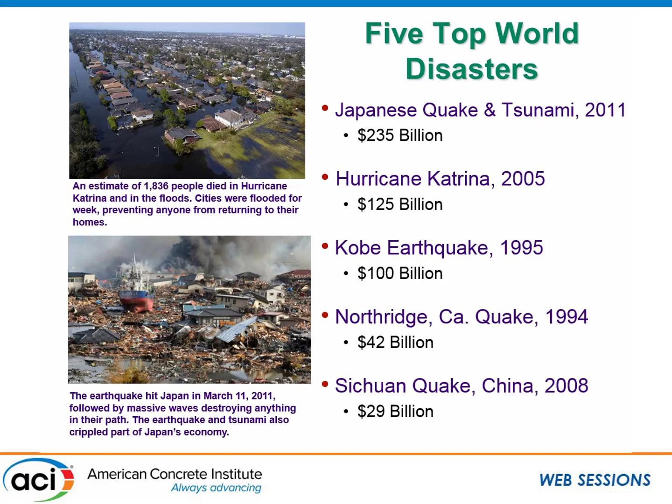When we really look at resiliency, what we're seeing today is a lot of disasters occurring. Obviously this isn't an up-to-date slide, as we'd include our most recent disasters in the United States as well as those in the Pacific Rim. But what we see is that these disasters cost an enormous amount of socioeconomic dollars, as well as loss of life, loss of natural habitat, and loss of natural materials in many cases.

When we look at climate resiliency, we may look at it in many different ways. I like to look at it as your surrounding community, as a structure and the protection of that structure. It's not so much the impacts that the building has, but we need a structure to survive the impacts of nature as well.

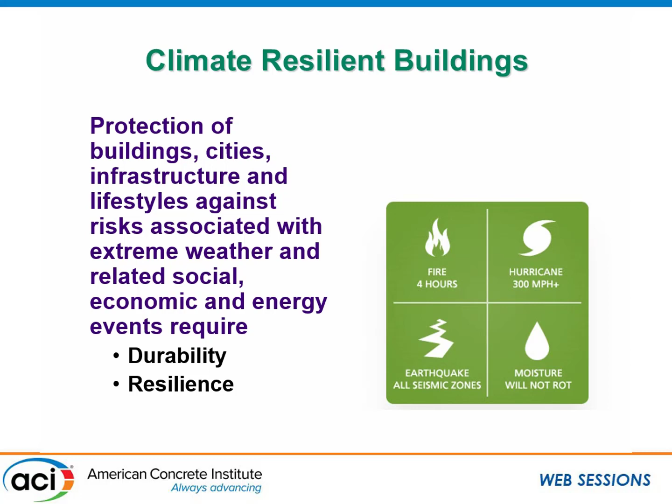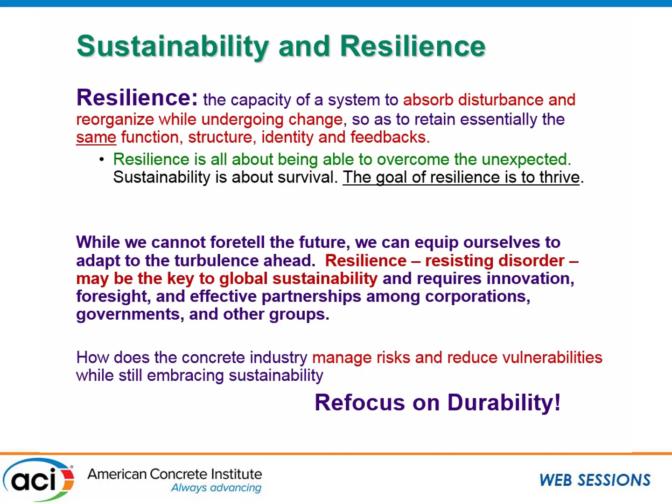This comes back to Dr. Miller's talk about durability and resilience. Durability will really dictate the life cycle assessment. When we talk about resiliency and sustainability, I like to look at them a little differently. I like to look at resilience as a very low probability event with a catastrophic conclusion, whereas sustainability involves everyday events that we must plan for, but which may not be catastrophic.

When we look at resilience and sustainability, this is where we start to see how chemical admixtures, performance cements, and high performance specifications can all be very helpful. Certainly we need to look at the adoption of codes, not prescriptive codes, but looking to the future of maybe performance-driven codes.

We look at some of the code changes now, like the Model 2010. We see changes starting to happen in ACI 318, and we know we have more to go, because certainly we need better materials to withstand disasters. If we look at the bottom graph, a natural disaster can have true consequences on the socioeconomic character of the community.

You can either bounce back very quickly and return to its natural state. Some of the things we're seeing now in code adoption is how fast a building can return to occupancy, or we can see simple devastation in the red line where that community will never return to its vitality.

Case in point, for those who missed the Sustainability Forum yesterday, there was a discussion on the difference between Hurricane Katrina and its impacts on New Orleans. That city has never quite recovered. But if we look at the same kind of plan and activities going on in a city like Nashville, it's booming in its economy now.

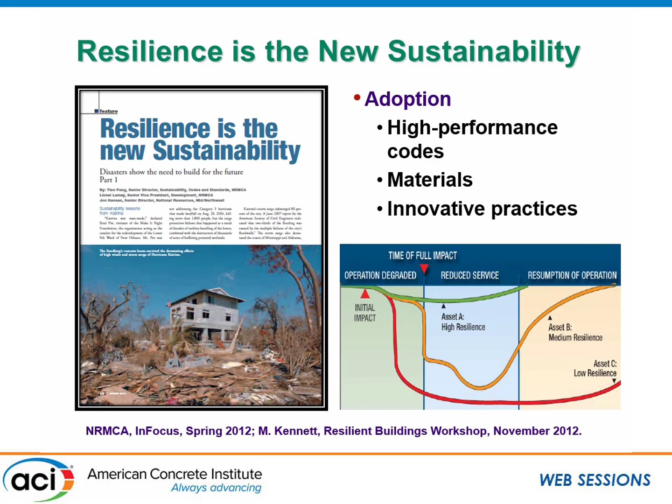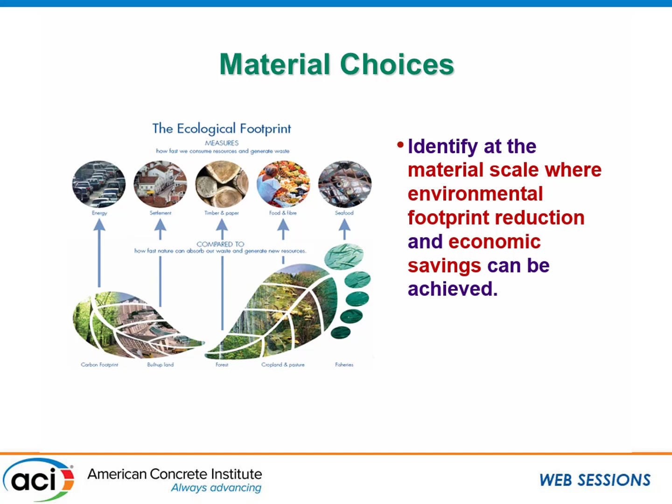So we can see devastation can have impacts in many different ways. But we really must look at materials as well and their impacts. We have to look at the environmental scale and the material scale, so we can look at the carbon footprint from energy from different types of structures, and we can look at the economic savings it can bring.

When we look at materials, a lot of us like to look at embodied energy choices. But I caution you, don't look at just the material and its embodied choice. We're going to look further into the whole life cycle assessment as was presented by Sabbie Miller. When we look at concrete as a whole, it has a very low embodied energy in its production.

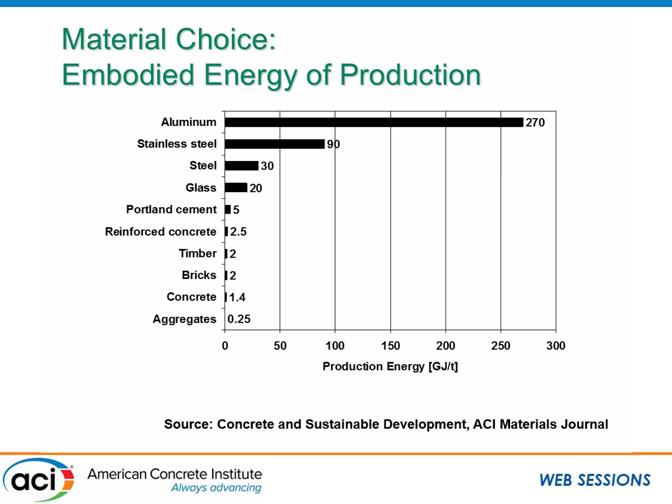Now in comparison, cement is very high and has a much higher corresponding embodied value. But normally when we build, we don't build with cement, we build with concrete. So when we look at cement versus concrete, we know cement inherently has very high embodied energy. It really can't help that, because of the decarbonation reaction that takes place when we burn limestone.

So when we look at the sources of CO2 in cement and concrete, this is an older figure with about 33 billion tons produced in 2011. We know that for every 1 metric ton of cement, we're going to see approximately 0.978 tons of CO2 produced as well.

But there are ways that we can reduce that lever, and that's where we'd have heard from the first presenter, had he been able to make it today, he would have talked about some of the levers that can change what we do to help cement be lower in its embodied carbon. Much of this comes down to cementitious blends as a method of reducing CO2 and also improving durability.

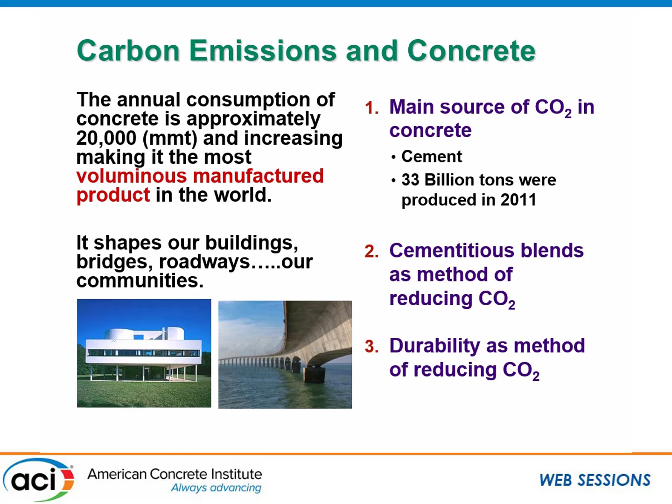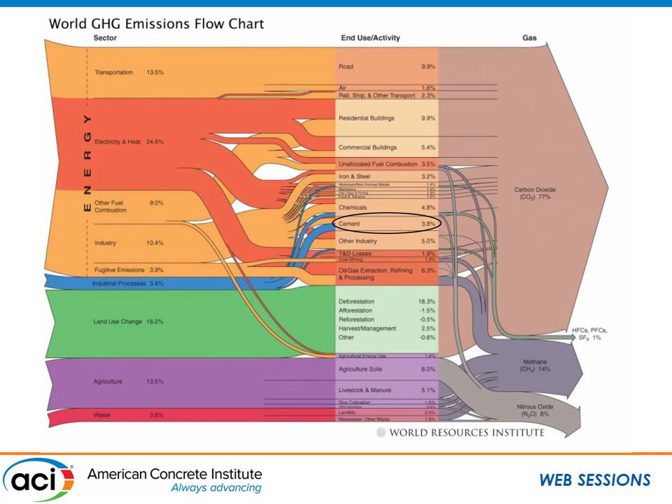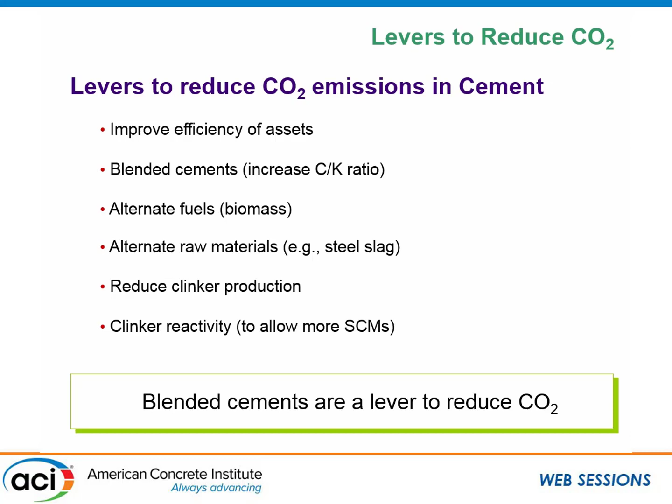The levers to change cement are simply improving the efficiency of the assets, using blended cements, alternative fuels and biomass, alternative raw materials in manufacture, reducing clinker production, and changing clinker reactivity. But really, blended cements are the best way to lower the impact of cement production on CO2.

As we look at raw material substitutions, we can see that if we have 1 metric ton of dry raw materials, we still have calcination occurring in the decarbonation, and we're still going to see production of CO2. But we can really lower that when we start looking at using blends in lieu of straight Portland cement.

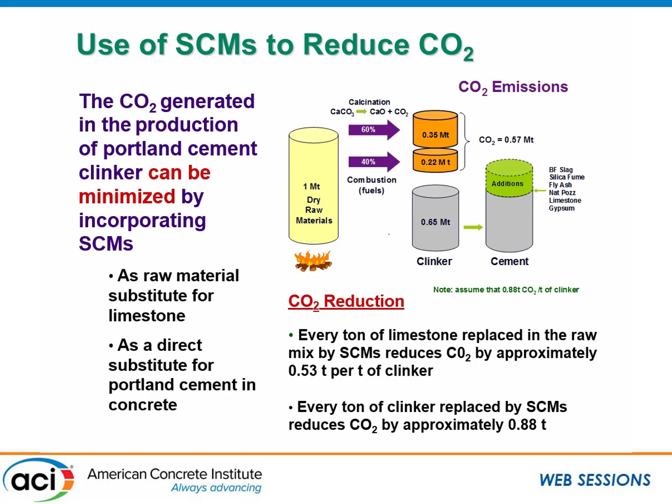We can see those reductions when we start blending slag, silica fume, fly ash, or other natural pozzolans. For every ton of limestone, limestone can also be used to replace raw mix with SCMs, and we can see almost a reduction in CO2 content.

A small percentage of embodied energy is only in concrete versus cement, certainly about 100 to 300 kilograms per cubic meter. Concrete typically uses 7 to 15% cement by weight.

If we can lower that impact of 7 to 15% by weight by using supplementary cementitious materials, other pozzolans, and blended cement, we can inherently impact the amount of CO2. We also see CO2 reabsorption through carbonation, and from calcination we can see 33 to 57% of CO2 emitted and reabsorbed by carbonation over a 100-year life cycle.

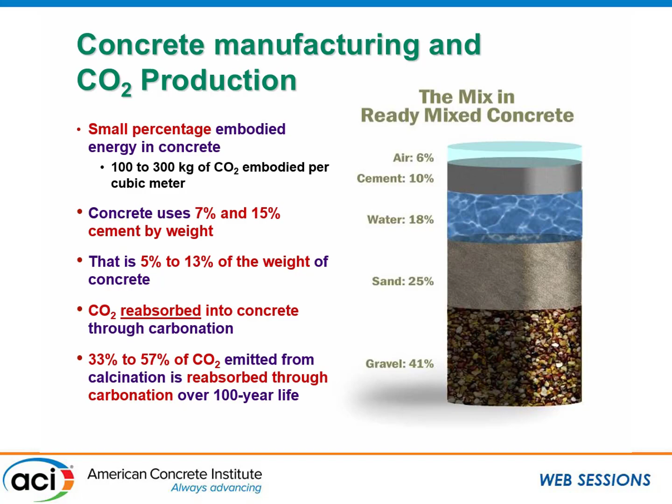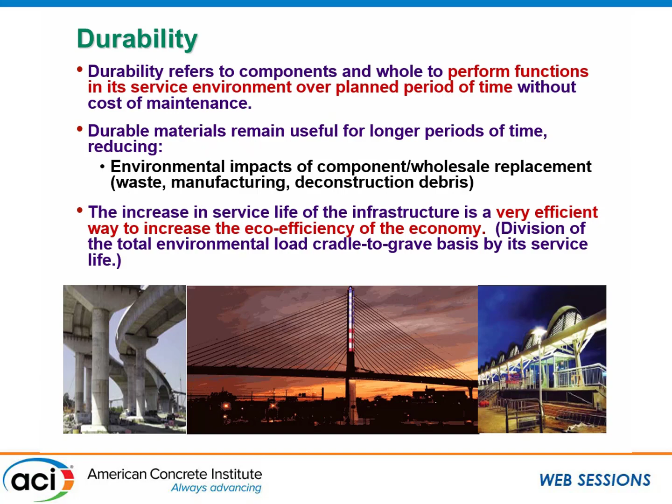Just in closing, I'm going to go through a few slides to cover what Sabby was talking about: durability, the ability to perform your function in a service environment over the planned period of time. We can do this very effectively when we see blended cements.

Here's some data that discusses a ternary blend. In this ternary blend, we were using between 4 and 6% silica fume and anywhere between 25 and 40% slag cement, looking at how it impacts durability characteristics.

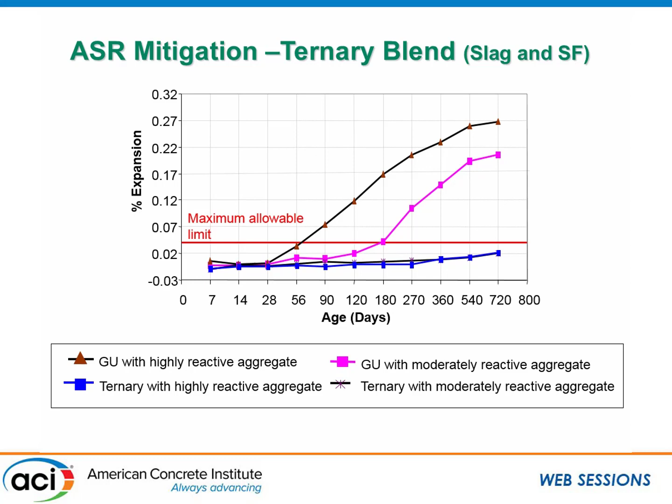Here is ASR mitigation. We can see there are 4-25 blends and 4-40 blends here, with silica fume being the 4, and 25 being the slag. We can see what would happen with the RCP data at 1 year and 2 years.

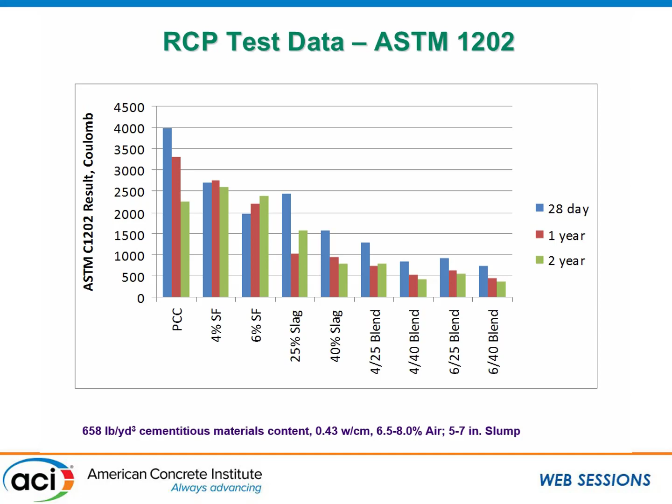We're seeing much different results than we would with straight ordinary Portland cement, shown in the first column. We can also see chloride diffusion coefficients lowered over time, as expected. This was a 650 pounds per cubic yard cementitious content with a 0.43 water-to-cementitious ratio.

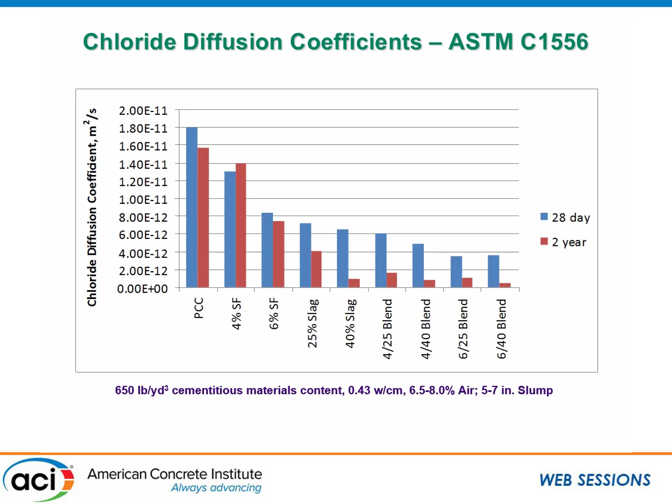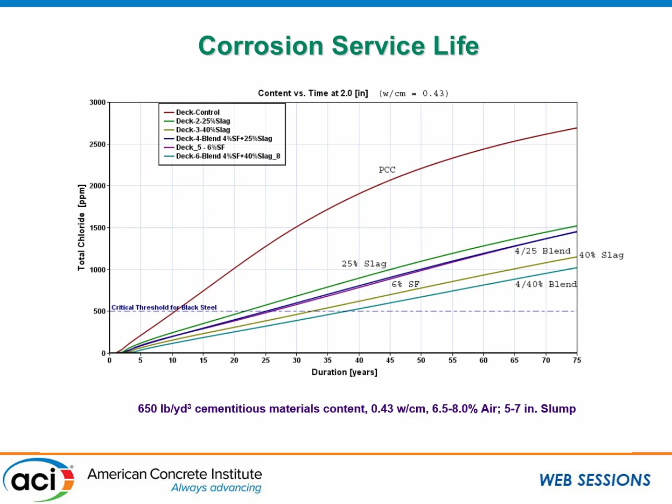Looking at ionic diffusion coefficient and how this would impact corrosion service life, we can tie this back into the life cycle assessment and life cycle costing, which is very important when choosing materials for our projects.

But really, when it comes down to it, I think this graph sums things up. It's very important in the materials we choose because they have impacts, and those impacts can come if they do not provide long-term durability.

If we look at the overall life cycle of this particular infrastructure model, the raw materials we choose and use in construction have embodied energy in the product used to manufacture the concrete. But we must also look at the embodied energy used through its entire life cycle.

That's what's important here, and unfortunately what Sabby didn't get to cover: by extending the service life and lowering the amount of repair and maintenance, we actually come up with better sustainable structures. We can raise the bar on sustainability, meaning we have a longer period of time before end of service life.

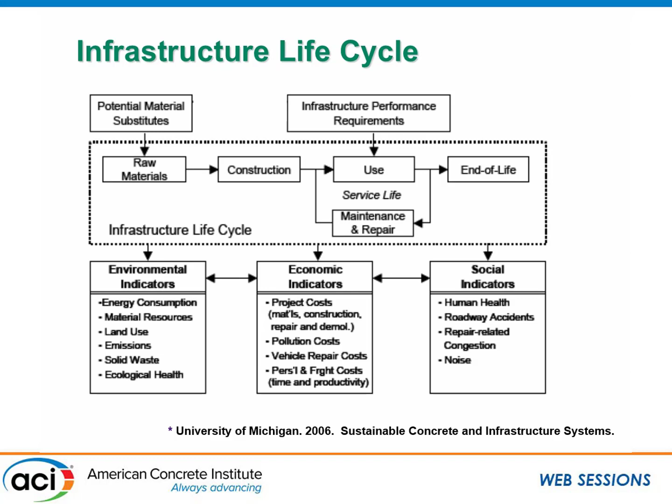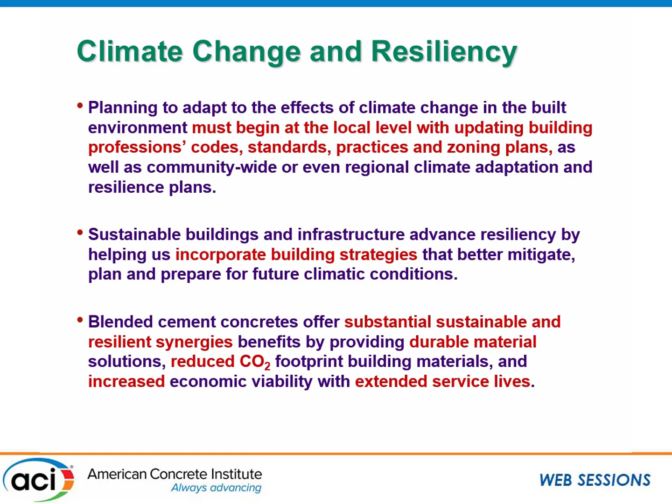Remind yourself that with every choice, there are impacts on environmental indicators, economic indicators, and social indicators. So in conclusion, we need to adopt high-performance codes along with high-performance materials to ensure we can incorporate better building strategies for the future, reduce our CO2 footprint, and extend our service life so that concrete as a whole can be a more sustainable material.

In closing, it's really important that we think about the overall long-term durability of our structures, because as many of us know, it's when we replace structures over and over again that we contribute to landfill waste, embodied energy use, and the depletion of valuable natural resources that could otherwise be conserved for future generations. So thank you.